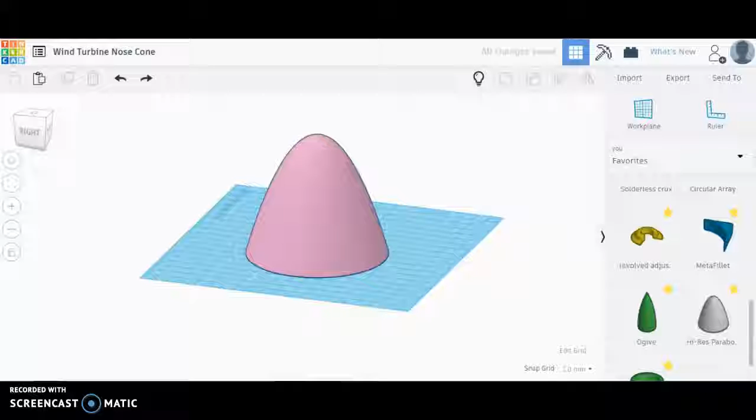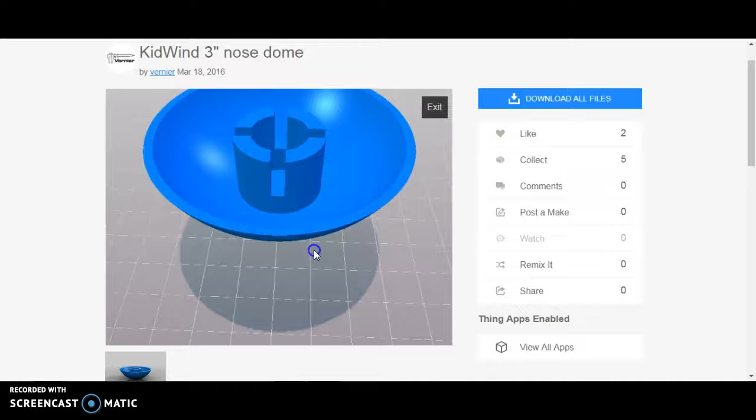Hi, in this video I'm going to show how to produce a fairly complex shape. This is a parabolic nose cone that is made specifically to fit over the standard KidWind hub. So KidWind produces this part, which is available on Thingiverse for free download and printing. And you can see they've made this to fit over the tightening piece of the KidWind hub.

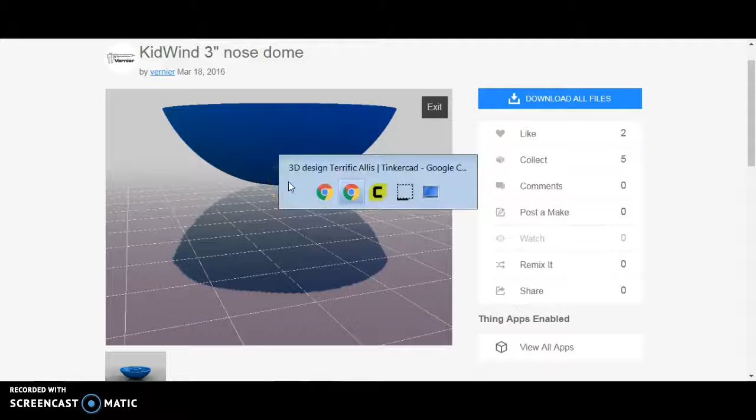But I want to show you how to do this in Tinkercad so you can have more control over things like your diameter. You can print something that's much lighter and uses less material, and also something with possibly a more aerodynamic shape because it's a longer cone.

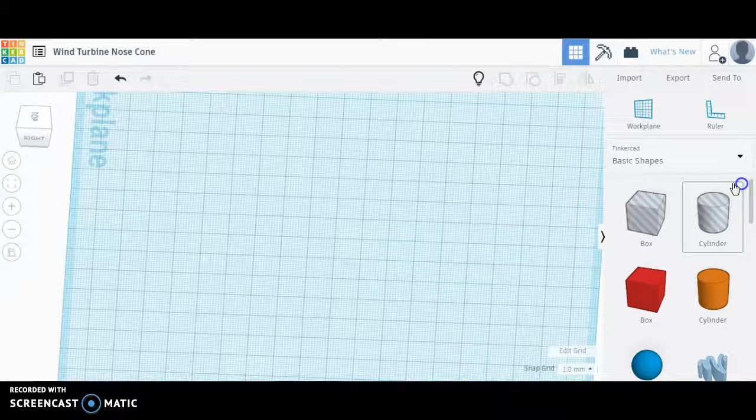So I'm going to delete all this hard work, and I'll start by showing that just under basic shapes, Tinkercad has this paraboloid, but I am using under my favorites. You can find this in shape generators, and under shape generators all, dig around for it and add it to your favorites. I'm going to use the higher resolution paraboloid. So I'll drop this on my work plane.

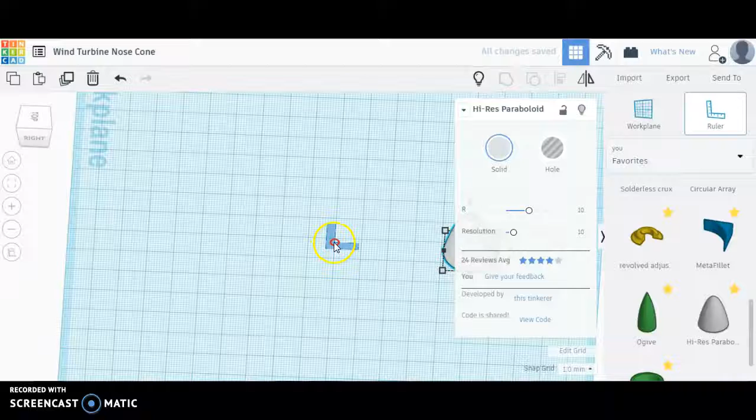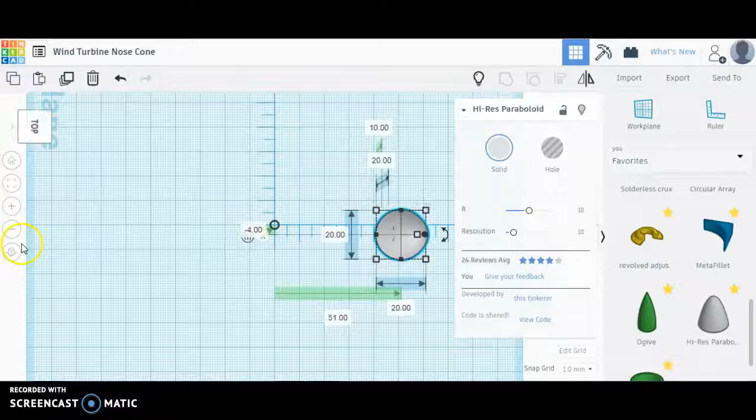I'm going to start with a ruler, which is my preferred way to align things, and as you'll see, there's a lot of alignment involved in this little project. So I'll start with a good top view and switch. Okay, here I am in perspective view, and you can see that you have that perspective. I prefer usually to work in the orthographic view so that I have a perfect circle, orthographic projection. I'm going to center this up by zeroing out the distances from my ruler.

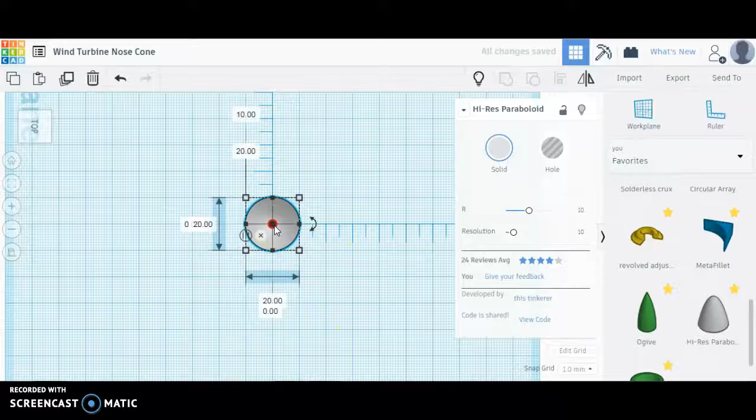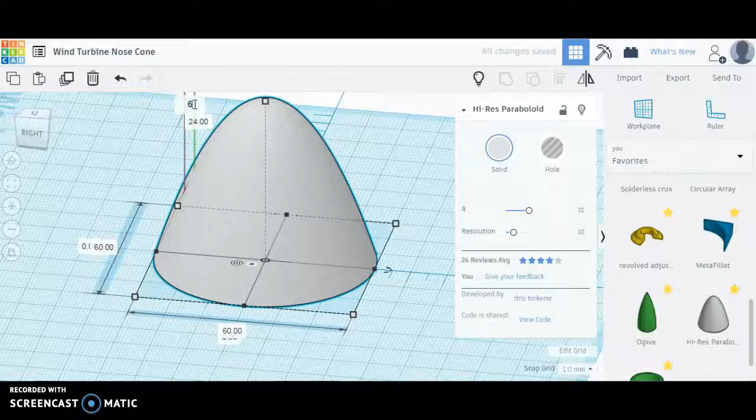So I'm now centered over my ruler, and maybe next I will change the diameter. I'm going to go with 60 millimeters because that is the diameter of the KidWind hub. And now you might want to go quite a bit larger, potentially. Now, just looking for a height that kind of makes sense. I think I will set that at 60. And here we are. We have a good start.

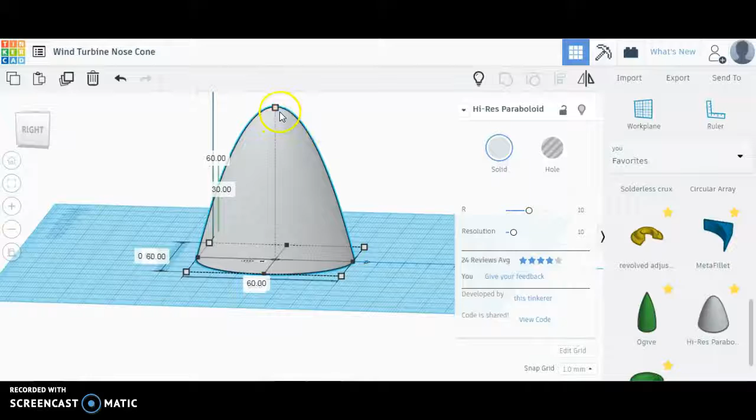Looks like we're not centered on the work plane, maybe after that height adjustment. So I'm going to hit D for drop with this selected. That's going to move it exactly to the work plane where I want it. Okay, next step is going to be to copy. Control C, Control V. I'm going to make a copy of this paraboloid and make it just ever so slightly smaller by holding down the Shift key. Holding the Shift key is going to enable me to scale everything at the same time and not just change a height.

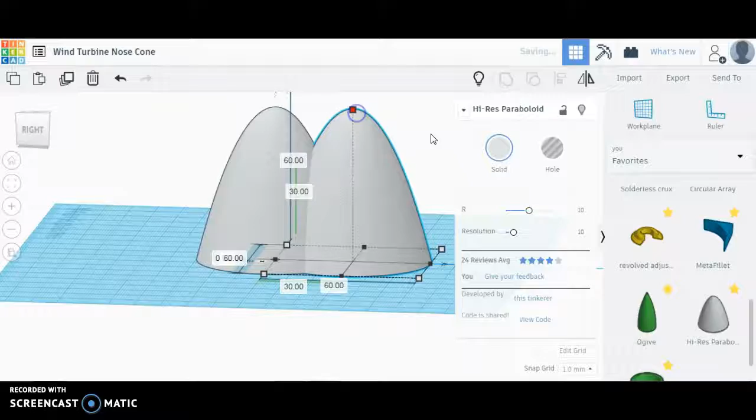Okay, so we know that our original was 60, and if I change that to 59, I have a 1 millimeter thick shape. I'm actually trying to get thinner than that. And I'm not sure if holding Shift again, if zooming in a little will let me get finer detail, or maybe I need to change my snap grid down here from 1 millimeter to 0.5 millimeter, and holding Shift I was able to get 59.5.

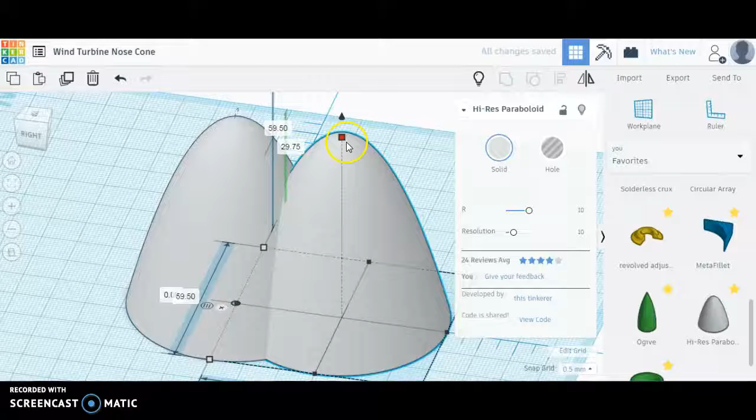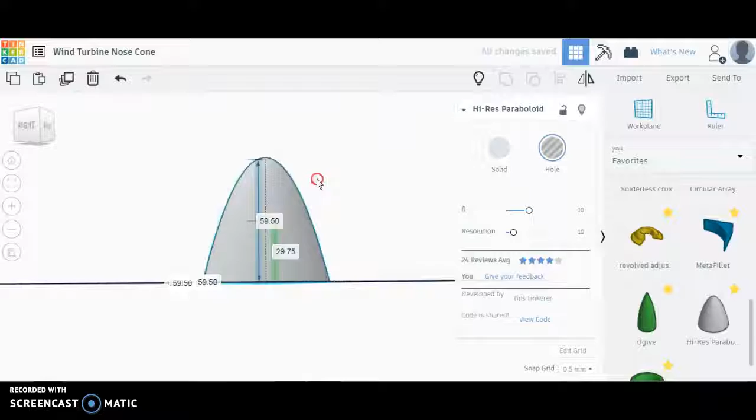Okay, I'm going to make this a hole. I'm going to hit D, make sure it's dropped on the work plane. And I need to zero these. Okay, now it looks like things are well centered, and I can see that 0.5 millimeter thickness there. So I'm going to Control A, and I can either hit this group button, or I like the shortcut Control G. Okay, you'll see now we've got essentially a very thin shell for a nose cone.